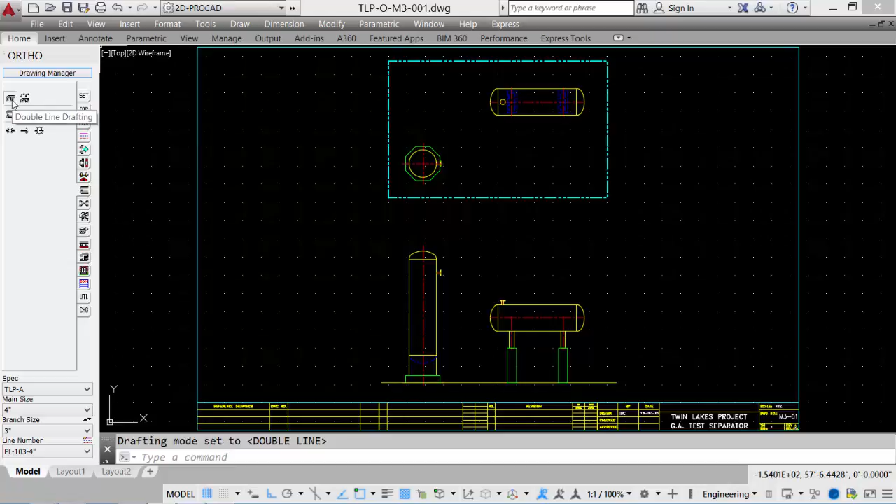So let's just zoom up on the side of our drawing before we actually place any components on our equipment. Let's just look at how the pipe tools work. Selecting our pipe tool, it asks for a start point and an end point, and a pipe is drawn. We change our pipe size, 8-inch, place pipe, just randomly.

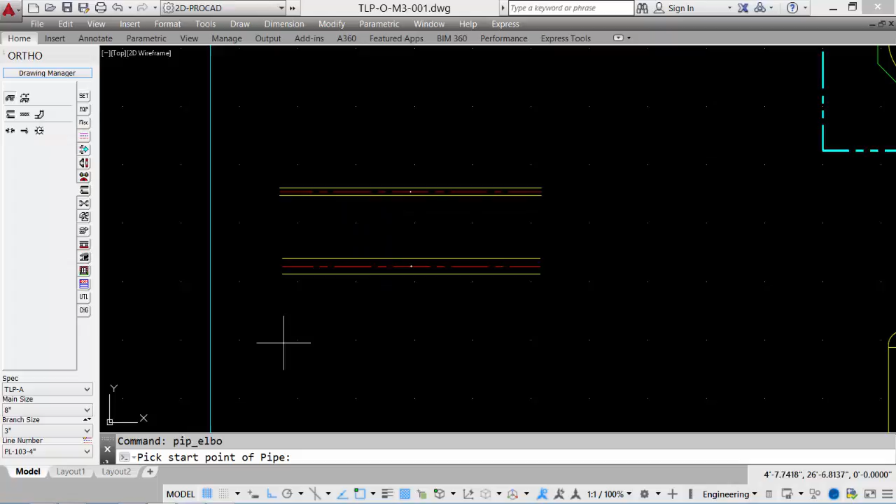We see the pipe. Again, the drawing scale for this drawing is 1/8 inch equals 1 foot. We actually see the deviation between 4-inch pipe and 8-inch pipe. There's a tool for adding pipe and an elbow. I can just add one elbow or two. I'll just show one. And we can pick a start point, the center of the 90-degree elbow.

It asks us which orientation we would like for our elbow, options available, and the default current selection. Then we just say draw a 90-degree elbow. It asks for a side for the elbow, and we can either pick down or up.

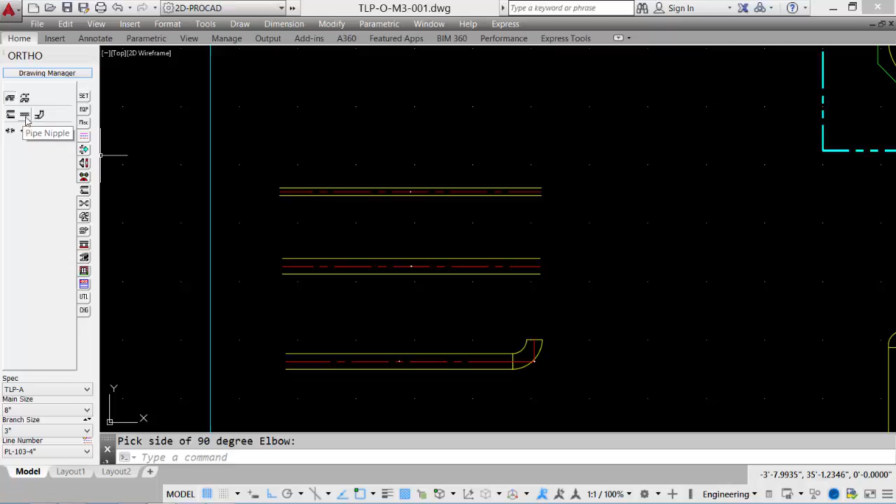There is a pipe nipple tool, so when we are down under 2-inch or less, let's go down to a 1-inch pipe size. We can now place a pipe nipple, and it asks whether or not you want it threaded both ends or plain one end. And there is our pipe nipple at 1 inch to scale. We'll go back to 4-inch.

Some of the other tools that we have are the pipe ends. So if we need a pipe break, we can actually pick one side of the pipe, the other side of the pipe, and then a distance along the pipe, and it breaks the pipe and shows our pipe break symbols.

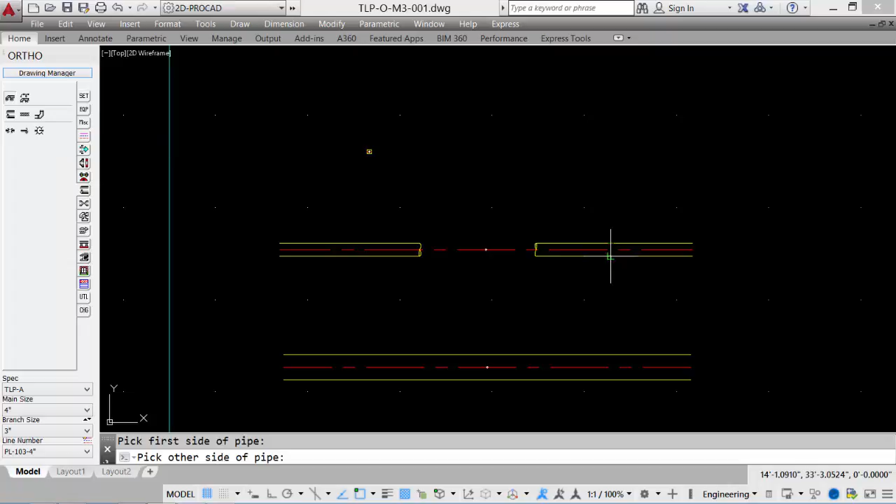We can just put in a pipe end symbol or floor or wall penetration symbol. We can select our pipe, other side of the pipe, and then the direction. And it puts in a pipe penetration symbol, showing it either going through the floor or through the wall in this case. Let's set it to single line drafting.

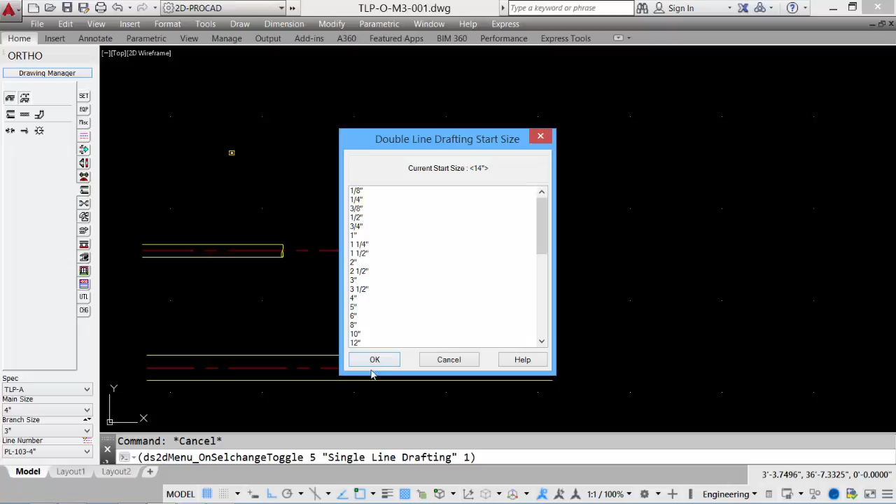Take a quick look. It always asks for when we want the double line. Even though we're in single line, a lot of companies have a starting size of 14 and larger that is always drawn as double line, even though it's a single line drawing. So we'll just take the default. Again, set it 4-inch. Let's place some pipe.

And now it shows up as a solid, thick line. Pipe with an elbow. Take the default. Point down this time. And now it shows the pipe plus a 90-degree elbow in single line. We'll set it back to our default.

Our next topic is the components. So now that we've covered the pipe, we've looked at all the different pipe options, let's look at all the other components. So we have flanges, we have gaskets and bolts, we have all of our different types of valves, from gate valves to globe valves to ball valves, to all of our piping fittings.

So our elbows, 90-degree elbows to 45-degree elbows, to reducers, to swedges, to tees and reducing tees and crosses, and things like weldolets, sockolets, and threadolets, all of those types of components that can be placed, all to scale, and all set by our spec, our main size, branch size, and line number.

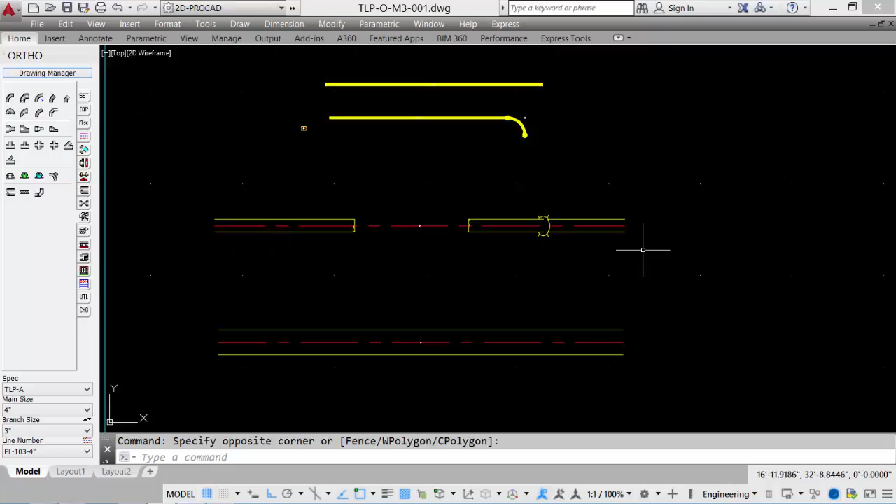So again, we always make sure we set this and change it as we draw to make sure that we're getting the right components. But let's just take a look at some of the basic components, things like a 90-degree elbow. Let's say I want to put a 90-degree elbow at the end of this pipe. Select our 90-degree elbow tool. The dialog appears and allows us to set the insertion point, either the weld point or the center point, and then the type of elbow that we want placed.

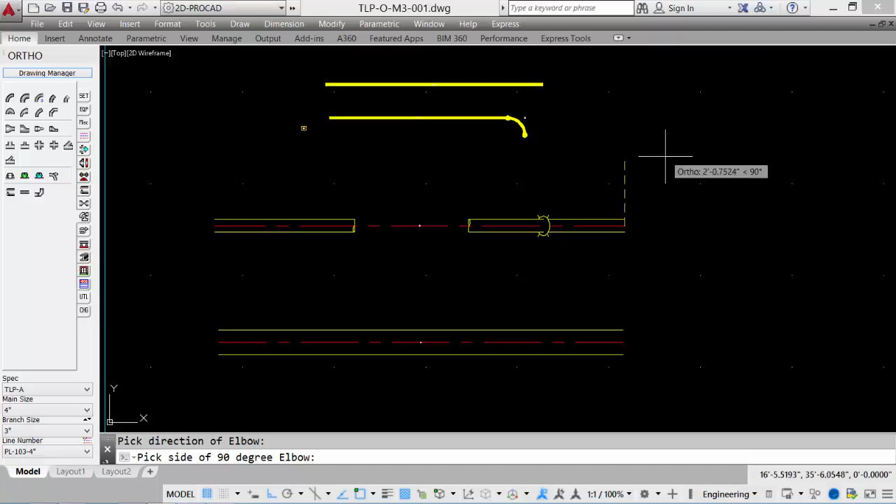And it's a long radius by default. Click Draw 90-degree elbow, and we can pick the end of this pipe. Pick direction of the elbow, we want to go down or up. We'll go down in this case, and it will attach the elbow to the end of the pipe.

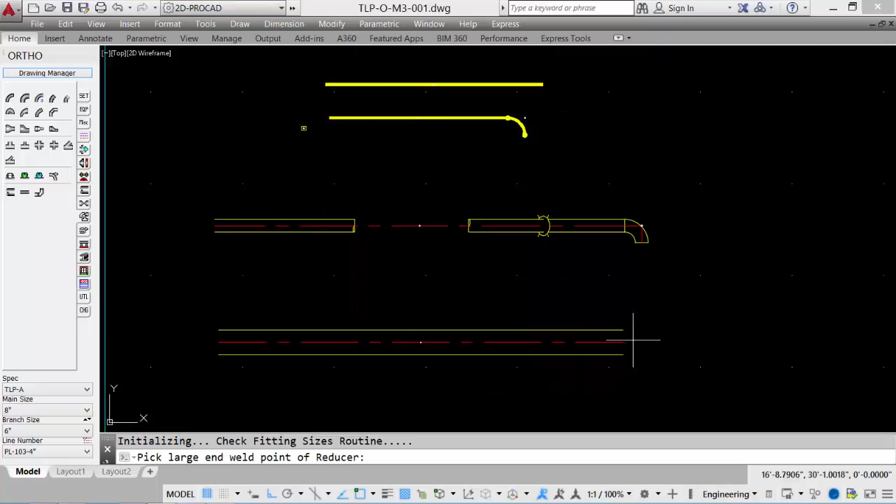We can come down to our sizes. Set our main size to 8-inch, branch size to 6-inch, and then we can select a concentric reducer. It shows us the sizes, and they can be changed, but we're picking up the current sizes, and we'll say OK. And I'll pick this end of the pipe, the direction, and it now puts in an 8x6. And you'll notice over in our status area that our main size has now been automatically switched to 6-inch from the 8-inch.

Let's look at placing a flange on our drawing, so we can select the flanges tool, select a weld neck flange. Select the insertion point, so we'll select the weld point. Click OK. We'll pick the end of the reducer and the direction. And our 6-inch flange is now placed.

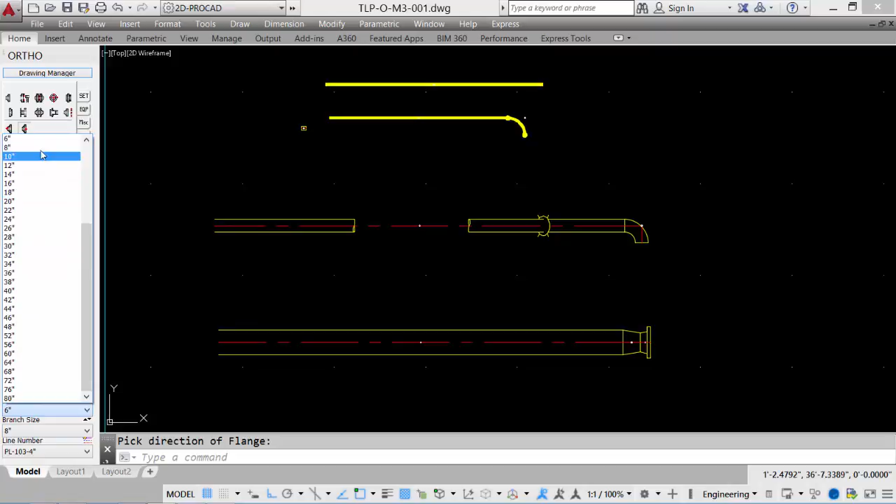Let's place a flange at this end, and we'll include a gasket and a bolt. First, we'll set our pipe size to 8-inch, and then we'll select the flange gasket bolt tool. Again, we'll select the weld point, click OK, pick the end of the pipe, drag to the left, and now it puts in a flange and a gasket bolt.

These symbols will not plot. They are on a layer called Defpoints and do not plot, but they are shown so that the drafter can see that the actual gasket and bolts were placed within the drawing.

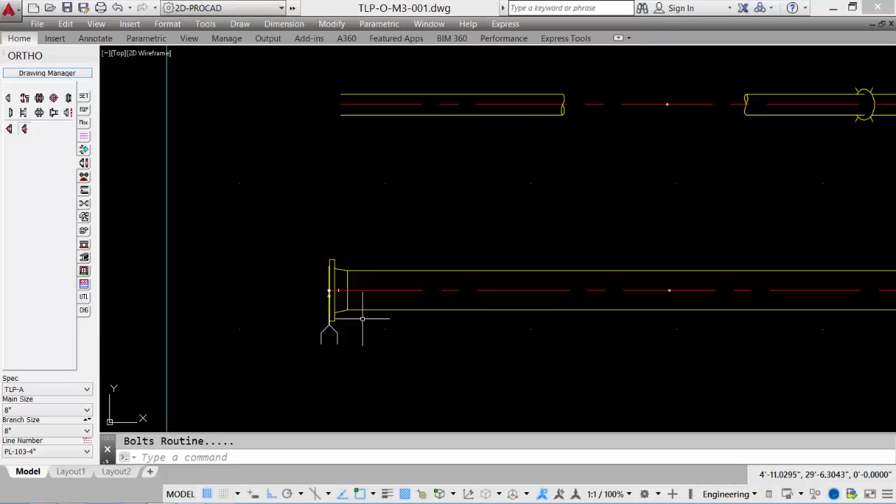We can place a flange off of this elbow here. We can then go to a 4-inch size. So again, I'm changing my size as I draft, pick the flange, and then I can pick the end of the elbow and drag down, and the flange is placed in that orientation.

Let's look at placing some valves. So I'll go to my valve tab. All the different valves are displayed. Set it at the flange, gasket, and valve. Gasket, valve, gasket, and flange, so if I had an existing flange that I want to draw from. And then if I just wanted to put in a full complete flange and valve set, where it would be the flange, the gasket, the valve, the gasket, and the flange.

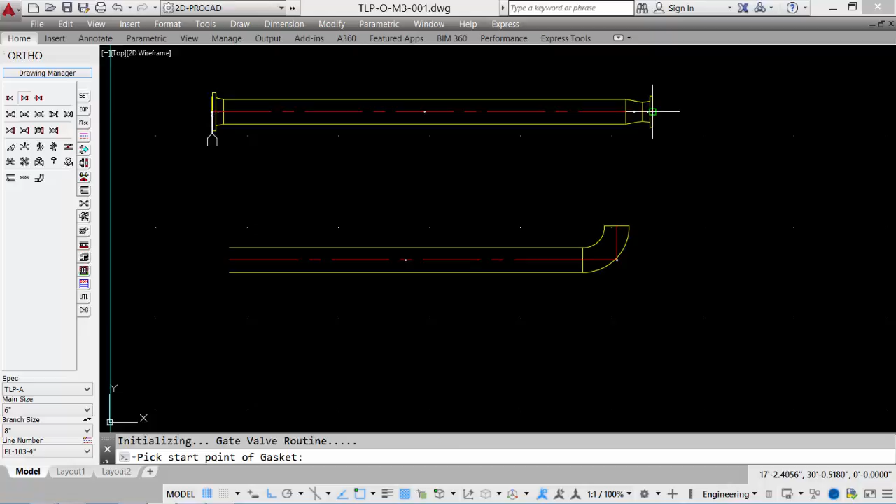So let's just put in a valve off of the end of this pipe here. So I'd first set my pipe size. We know that's 6 inches. I have an existing flange, but no gasket, so I would set it to the second item. And then let's just put in a gate valve. Pick the end of the flange, pick the direction, and it now adds the gasket and bolts in.

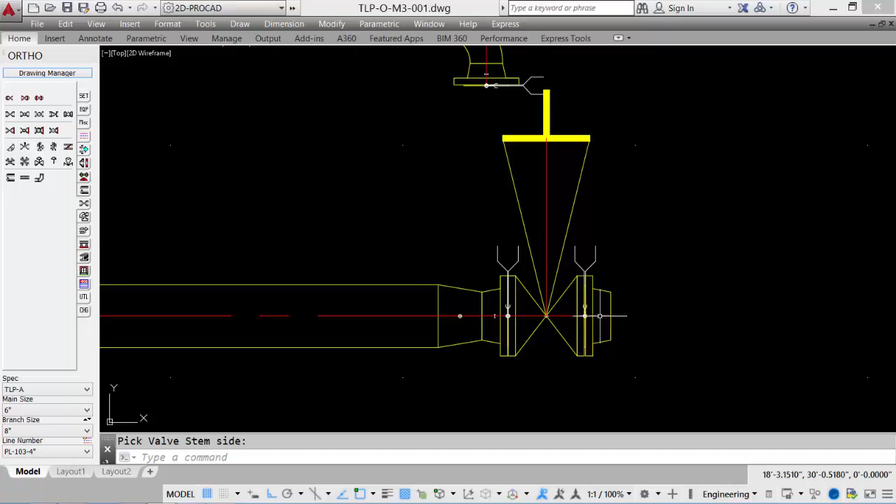And then it asks, do I want a valve stem? And we can say yes or no. And if we do say yes, what orientation do we want? Plan, side, or rotated? We'll just say side. Say OK. Pick the side we want the hand wheel to show up on. And then it completes the valve. So there's our valve stem, another gasket, and another flange. So placing components is quite simple, just a matter of setting our size and then selecting the components.

The next topic is info blocks. So once we've completed a drawing or worked on a drawing, we want to know what size a pipe or a component is. There is, under our settings tab, an item info tool which allows us to go in and select, for instance, the pipe, and it tells me it's 8-inch pipe. It tells me the spec, the line number, and a description. All of this information is set up in our spec generator.

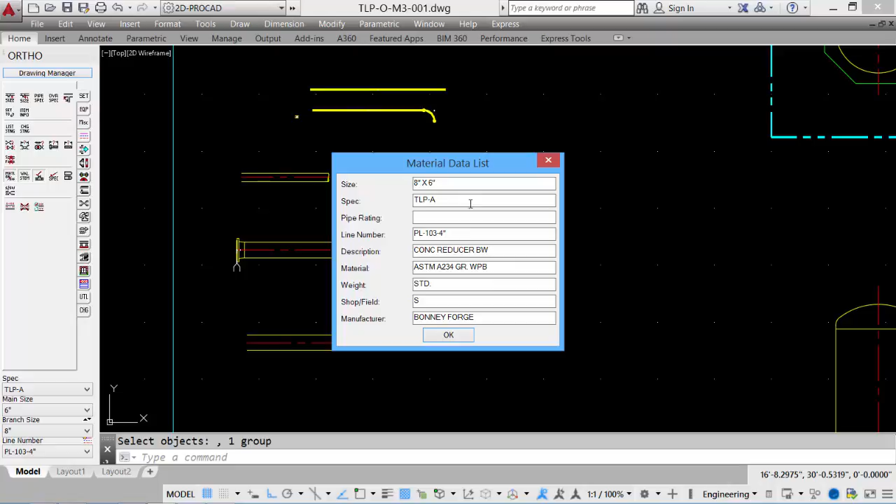So it's a good way of finding out what size components are if we're not sure. Selected my reducer, 8x6, concentric reducer. All of that information is shown.

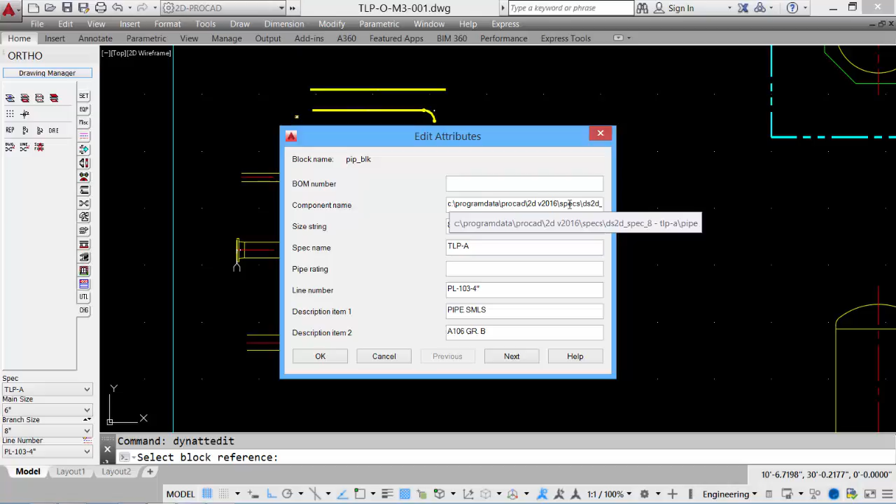For a more detailed view of a particular component, under the Change tab, we have our Dynamic Attribute Edit tool, which allows us to edit the information shown on a component. It also shows the component name and the file location of where that component is within the software. So if you're looking for the exact file where that pipe is located, it tells us the spec, the location, and the component. We can select Next, and it tells us the information, the dimensional data, all the information regarding that symbol. Very useful if you are looking at editing or adjusting the spec or the material data files.

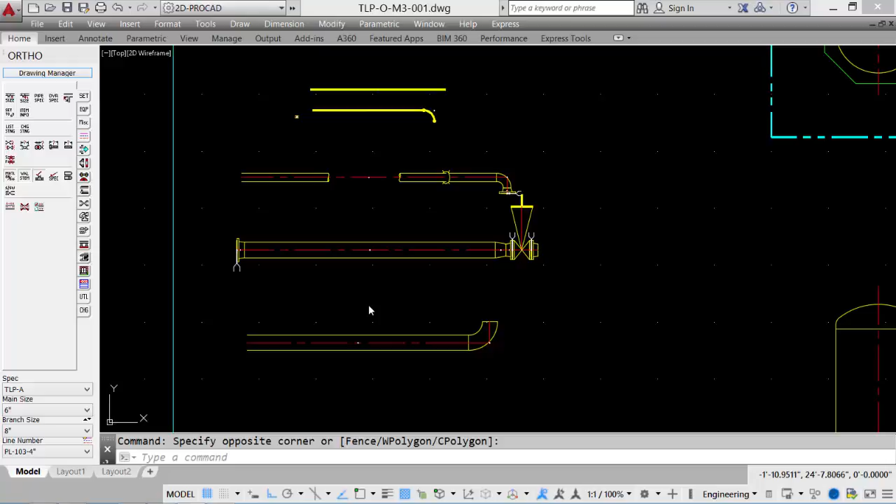The last topic in Module 3 is the AutoRoute feature. We'll look at placing components automatically, and then placing the piping in our drawing in both the plan view and the elevation.

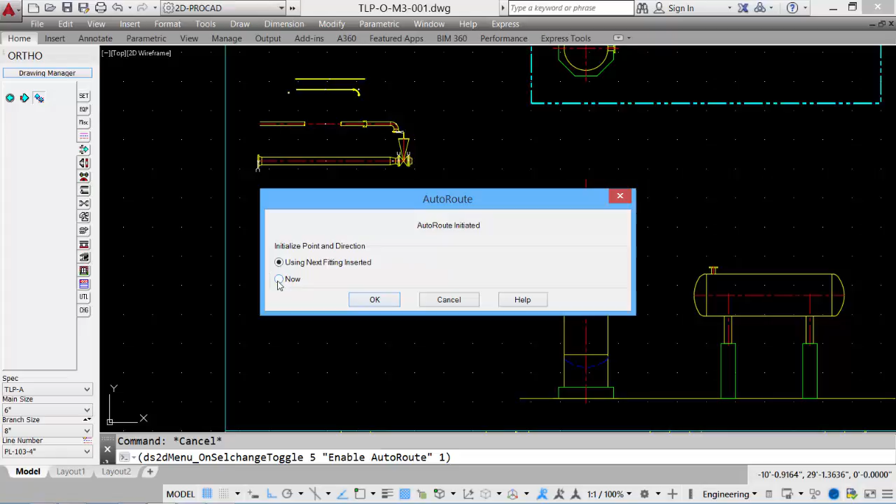The AutoRoute feature allows us, rather than having to pick the end points for instance when placing an elbow, to have the system automatically do that. So we'll go to our AutoRoute feature and enable it. It asks if we want to start it now or using the next fitting. I'll just use the next fitting.

Now I've set up my sizes. Let's set it to 8-inch to 6-inch, just for this sample. Then we'll go in and place some pipe. Click our pipe tool, and it places pipe like normal.

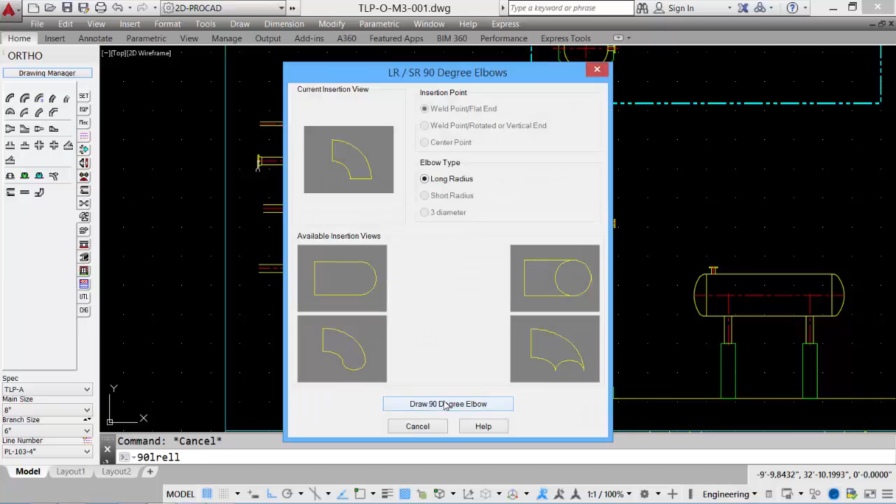Now when I add my next component, let's say we add an elbow to turn down, drawing a 90-degree elbow, I don't have to pick my start point. It's automatically selected as the last point. So all I have to do now is pick the side of the elbow, and the elbow is drawn.

I can then pick some pipe, and the start point of the pipe is automatically at the end of the elbow. Place another elbow, this time going to the right, and it automatically places the component. So as long as we know the dimensional data, we can quickly route the pipe.

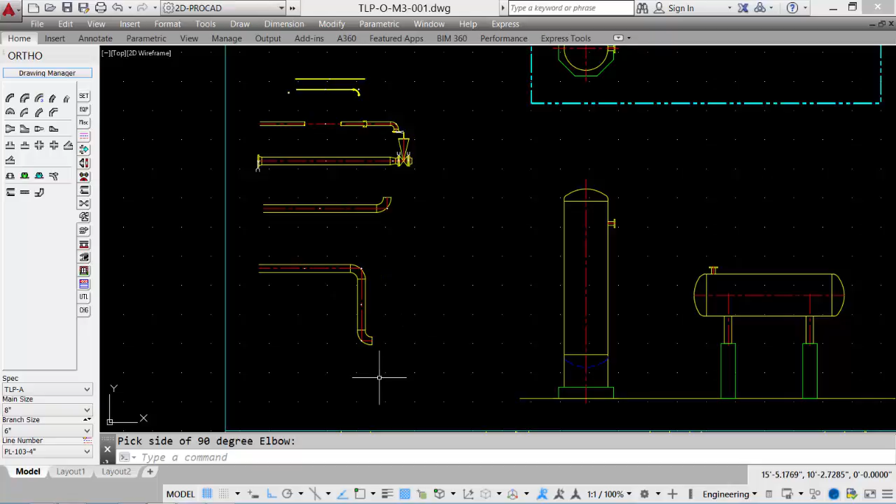Let's go in and place a valve. I'll select my valve with the flange and gaskets, pick everything, and then pick the gate valve. Again, we'll go to the side. It places the flange, gasket, valve, gasket, flange, automatically on the end of the elbow. I can then add a piece of pipe.

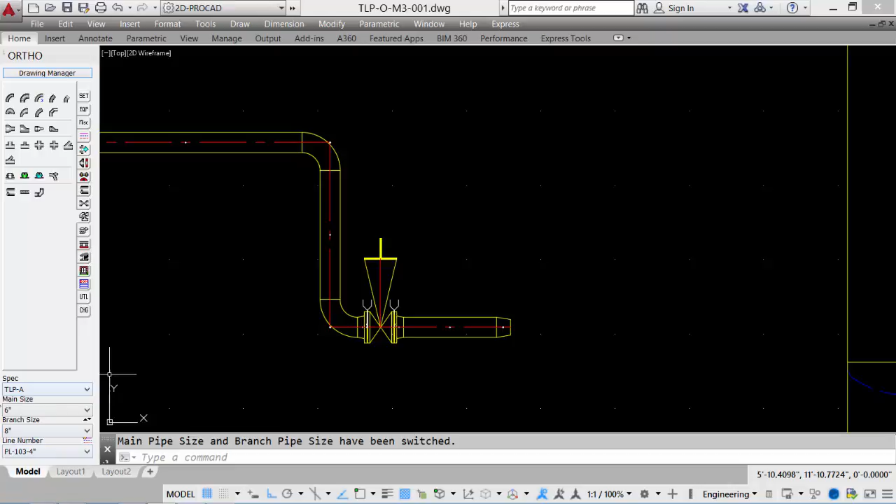I can go to my fittings and do a reducer. It automatically places the reducer, and also automatically changes the main and branch size. So now if I place some pipe, it's very easy to do.

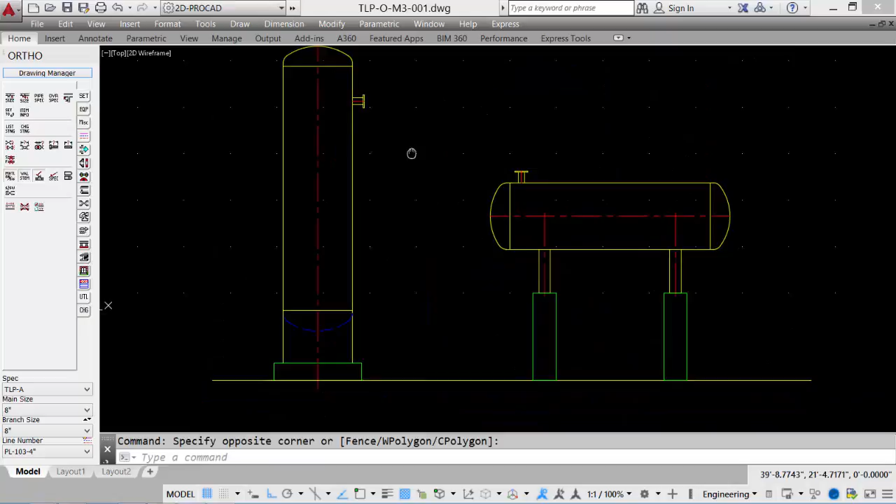At any time we can disable this by going back to our AutoRoute and disabling it. We can now place components individually. So let's erase all this extra piping and components, and look at adding the pipe to our drawing. We'll place our pipe, fittings, and components, starting with our elevation.

I'll set my sizes back to 4 inch to 3 inch for my branch size, since these are 4 inch nozzles. Then we can go in and start placing the components. If we know all the information, we can enable our AutoRoute feature.

We'll start off by drawing a piece of pipe with a flange and elbow. We'll come down through a valve down here, come back up with some pipe, and then tie off into the top of this nozzle with another flange.

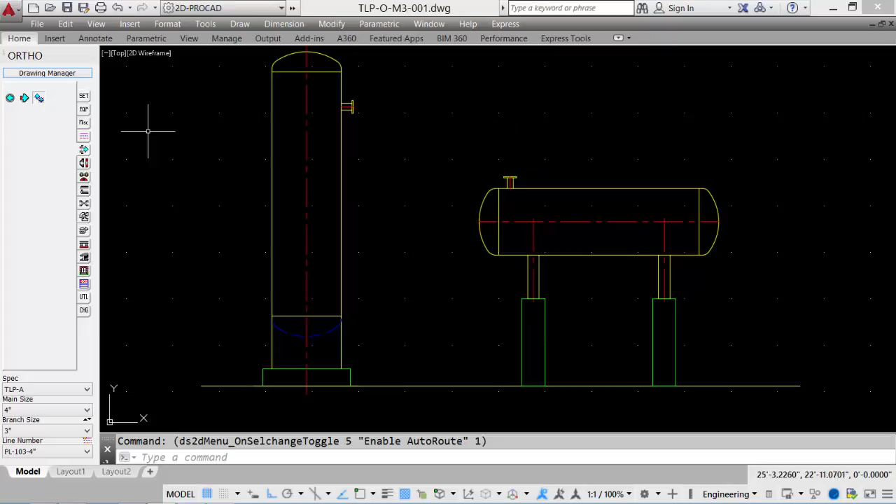We'll pick our flange and gasket tool, select the face of flange since we're going to mate up with this face of flange, and say OK. Pick the start point, pick the direction, and it places the gasket, bolt, and flange.

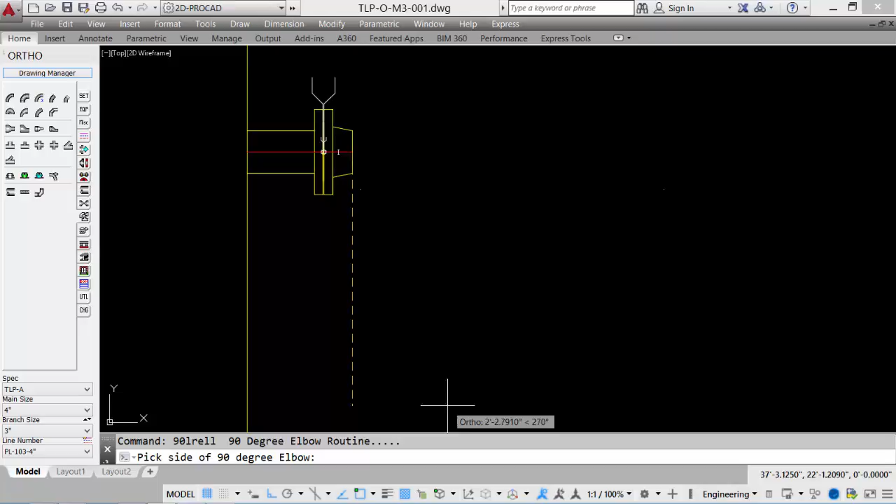I can then go to my fittings and place my 90-degree elbow. We're going to point it down, so that's the correct orientation. Select down, and there is our elbow.

We'll put in a piece of pipe, taking it somewhere near the bottom of the drawing, just guessing. We'll add another 90-degree elbow, and then let's say we want to put in a block valve. We'll put it on this side, and there is our valve placement, all automatically with the AutoRoute feature.

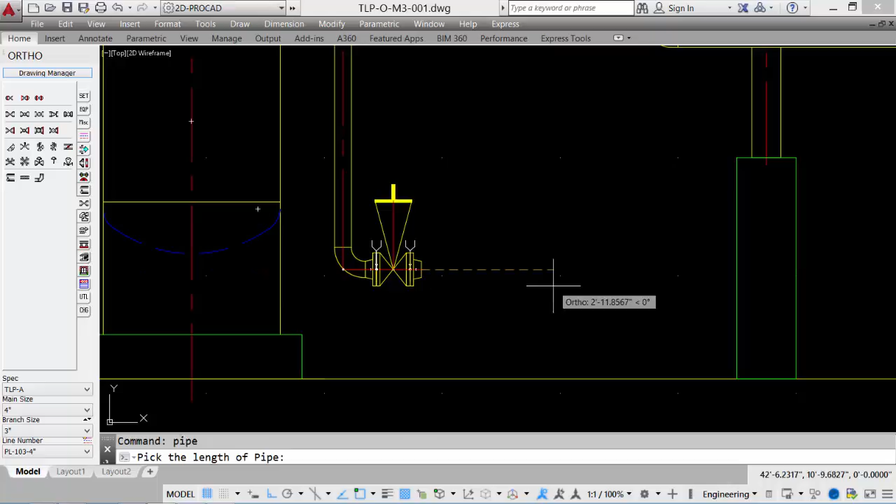Place another piece of pipe, random length. Then we'll go into our fittings, elbow pointing up, piece of pipe, and I'm just going to take it somewhere up near the top here, since we're not quite sure yet.

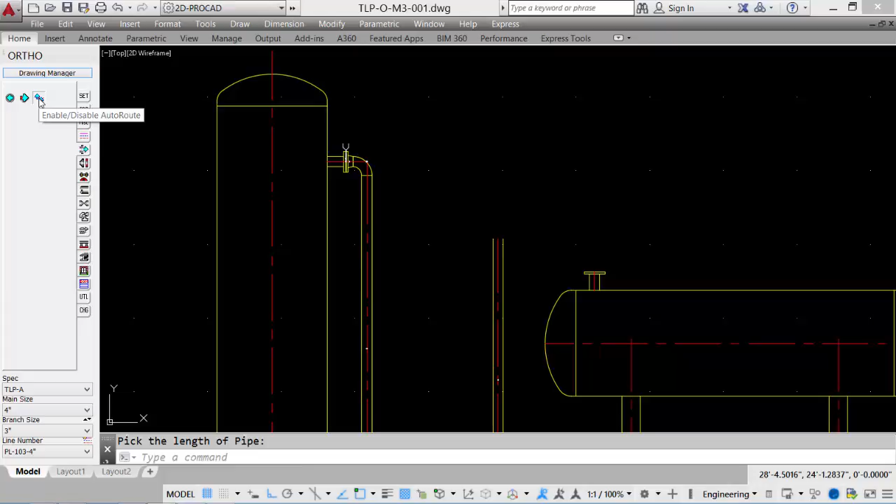What I want to do now is add a flange and an elbow coming off of the top of the vessel, so I need to turn off my AutoRoute feature. We just disable it, and then go back to our flanges.

Select our flange gasket bolt, pick the top from our nozzle, and our weld neck flange is placed.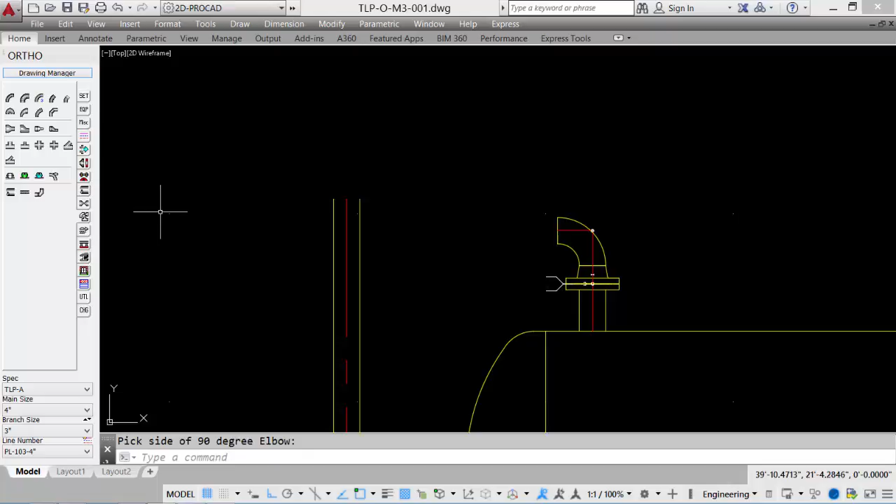We can then go into our fittings, place a 90-degree elbow, pick the start point, and then the direction. Now we can use an AutoCAD line command just as a trimming feature, and trim off to get it to the center line. So really what we're looking at here now is this center point.

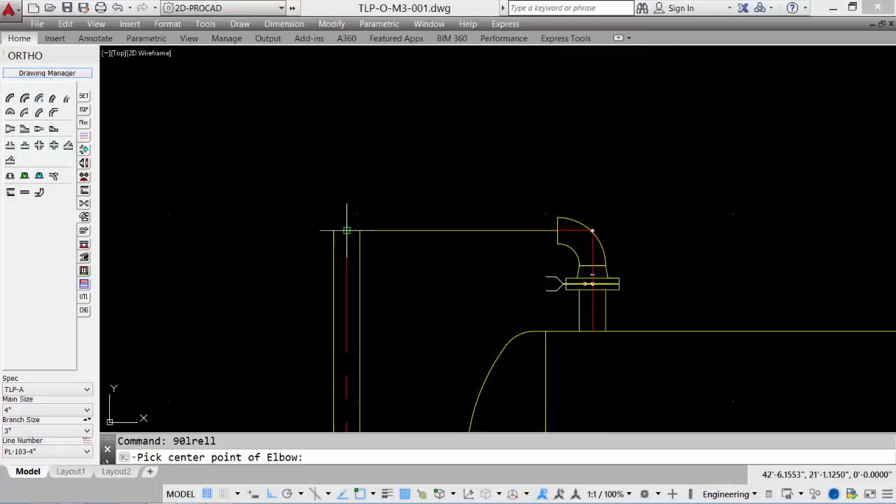So now if I place an elbow in that elevation, we'll be coming up and turning into the drawing. This is the orientation we want. I want to select the center point and then pick my 90-degree elbow, so the center point, then the flat side pointing down. We can see now the elbow is pointing down.

We would have an elbow on the back side turning to the right to match up with this one, so another 90-degree elbow. This time we use this orientation, again the center point. We pick our orientation, draw the elbow, pick up the center of that current elbow, and then place the flat side. The white circle does not plot; it's just there as a reference so you know it's a 90-degree elbow.

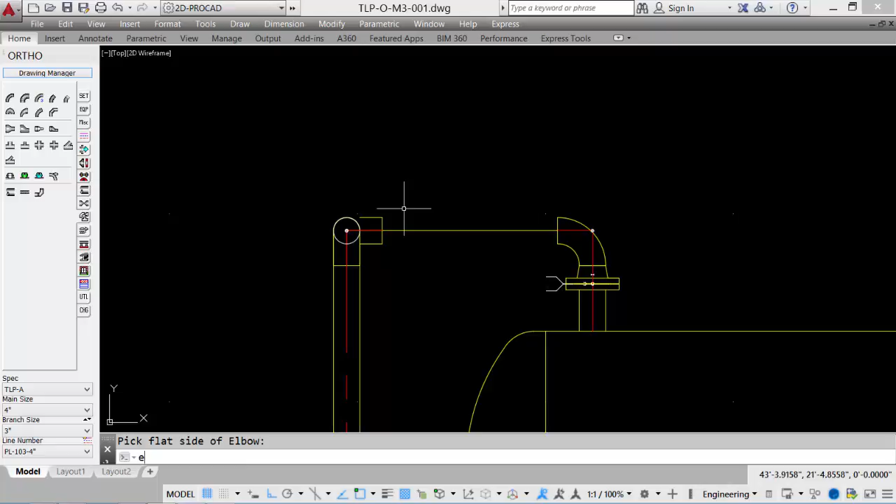We can use our extend and trim tools to fix any features that need to be extended. Then we can get rid of our construction line, and we can place a piece of pipe between the two elbows to finish off that view.

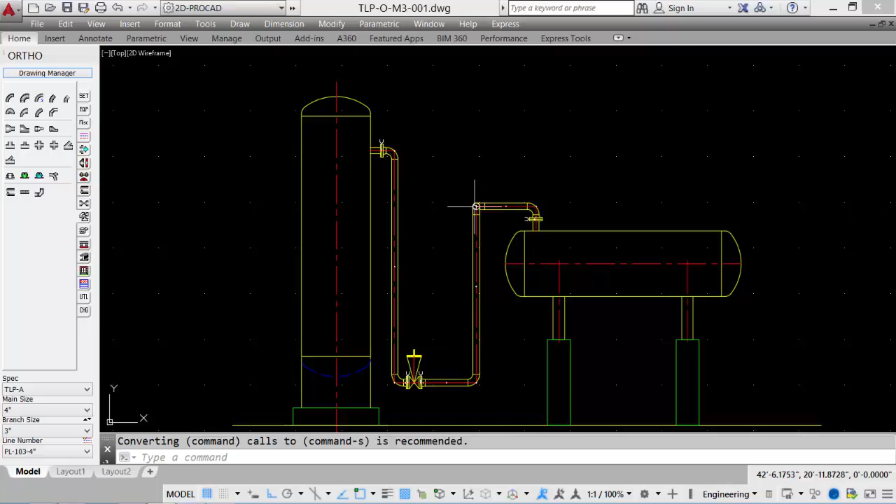So there is our elevation view: elbow down, turning down, through an elbow, through a valve, through an elbow up, through an elbow going away from us, turning to the side, and then coming down into the top of the vessel. Let's look at doing the plan view of that same feature.

So again, we can do a little bit of orthographic work. We can grab a line using AutoCAD and pick up the centers of these flanges to give us an idea of where some of these components are going to be coming from. Those are just construction lines I can use as guidelines.

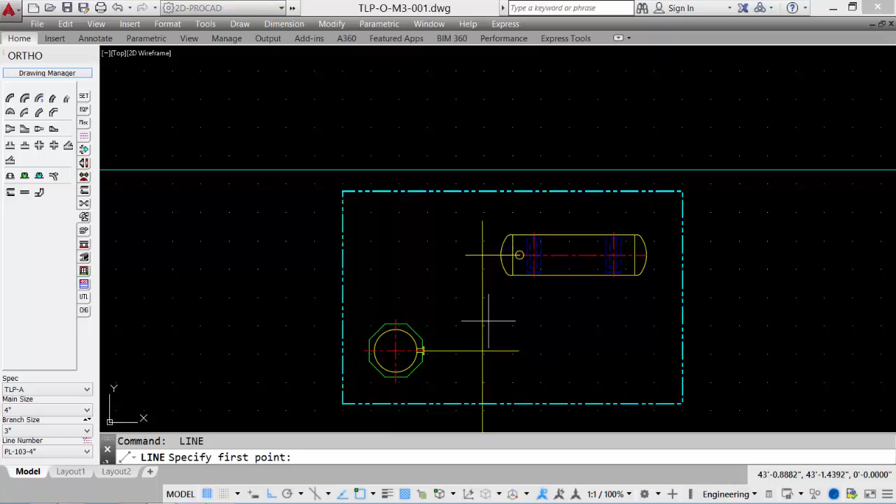We can go to our flanges. Face of flange coming off of a vertical vessel. There's our flange coming off.

Go to our fittings, 90-degree elbow. This one would be turning down, looking from the plan view, and we would want the weld point. Pick up the end of the flange, pick the direction, and there's our elbow turning down.

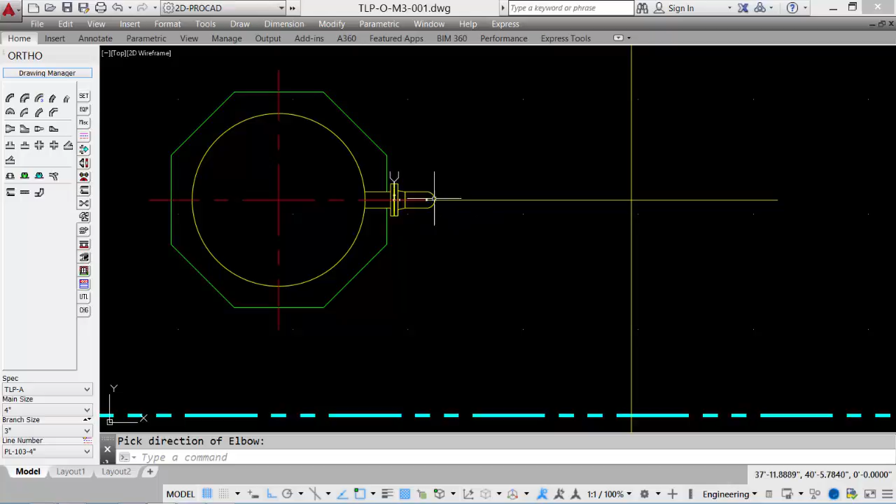So underneath that is a vertical run of pipe. And if we look at our elevation view, we have the elbow that turns and then goes through the valve.

Again, on this view we select our 90-degree elbow, select this one for the orientation, and again center point. Draw the 90-degree elbow, and pick up the center of that existing elbow, then the direction. Again we use our extend and trim tools to extend the lines from that fitting to the existing elbow. Now we're looking at the top view of the valve.

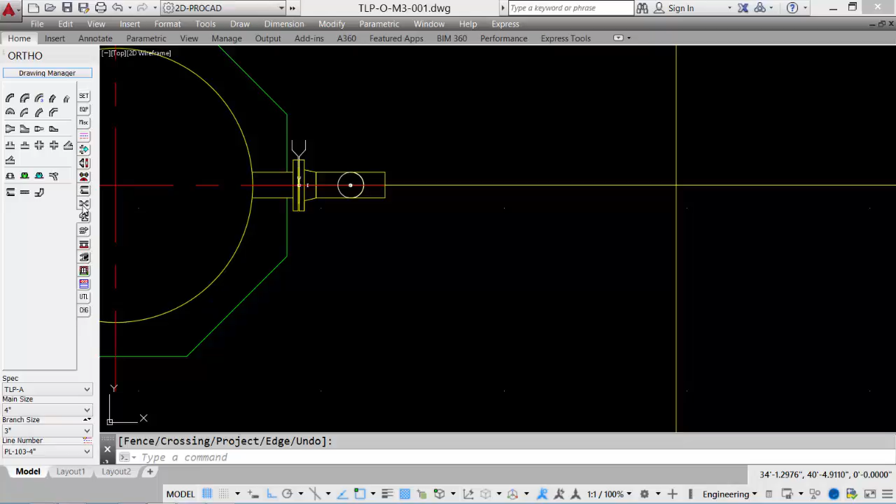We'll go to our valve tools and pick the same valve. Pick the start point, the direction. This time the stem will be in the plan view, so we'll just take the default, and it shows us the hand wheel in the plan view.

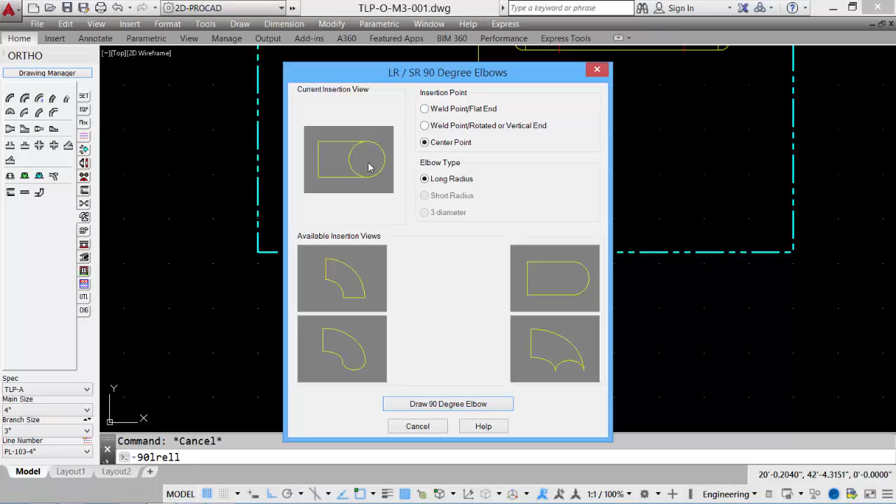Now we have this intersection over here where the elbow turns up, or we even place the pipe. We can go to our elbow and pick the center point, and that's the elbow we want. So we can draw that elbow from that intersection back.

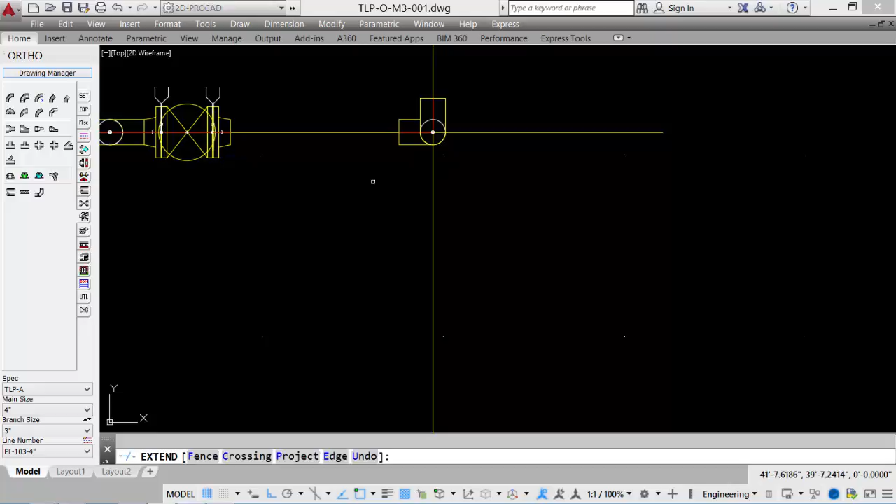We would then have an elbow that's turning away, again with center point. We can pick up the center of this existing elbow, give it the direction. We can extend our lines just to finish that off, and then add the pipe in between.

The two fittings, so this is looking down on that piece of pipe. Now we have a flat elbow going to come and turn to go into this one. We can place the elbow.

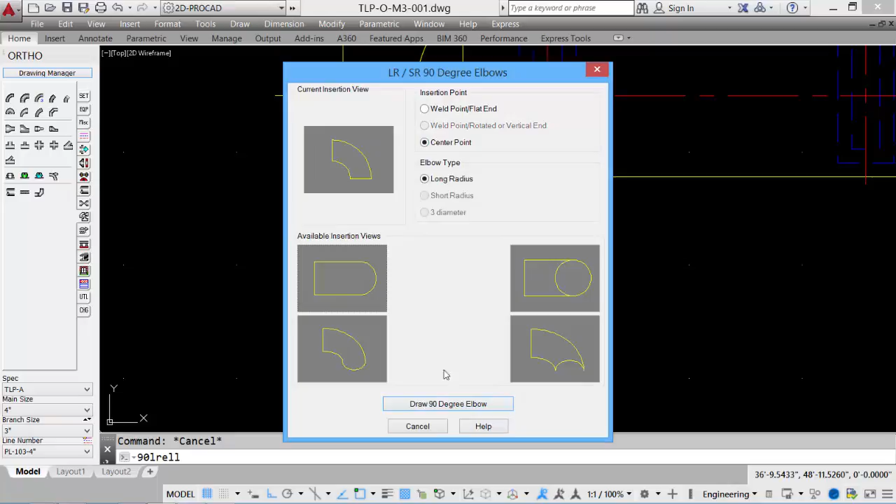It'll be a flat elbow. By center point, using my construction lines I placed, pick up the intersection, one side, the other side, and there's our elbow. We then have an elbow that turns down into the flange.

So we can select this item, center point again, and we can pick up the center of our nozzle. And there is our elbow.

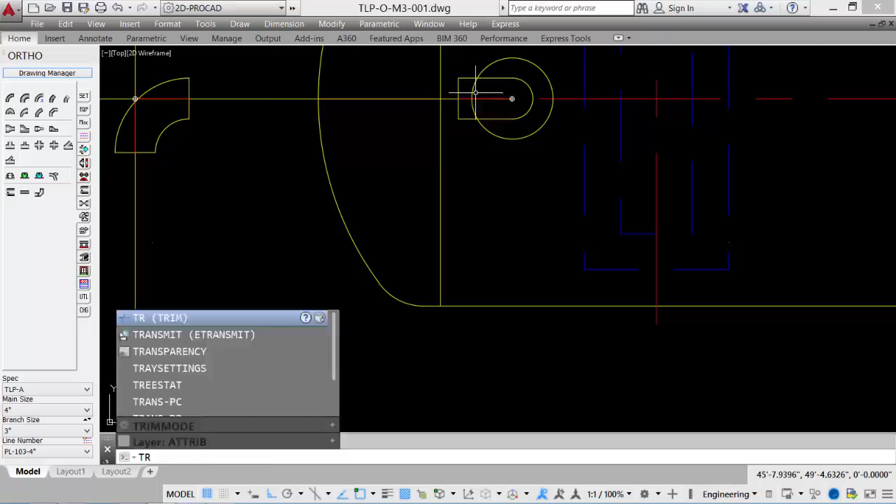We can use our trim tools to trim out some of these features, add the pipe in. I can then erase my construction lines that I had and finish off my pipe run with the length of pipe between elbows.

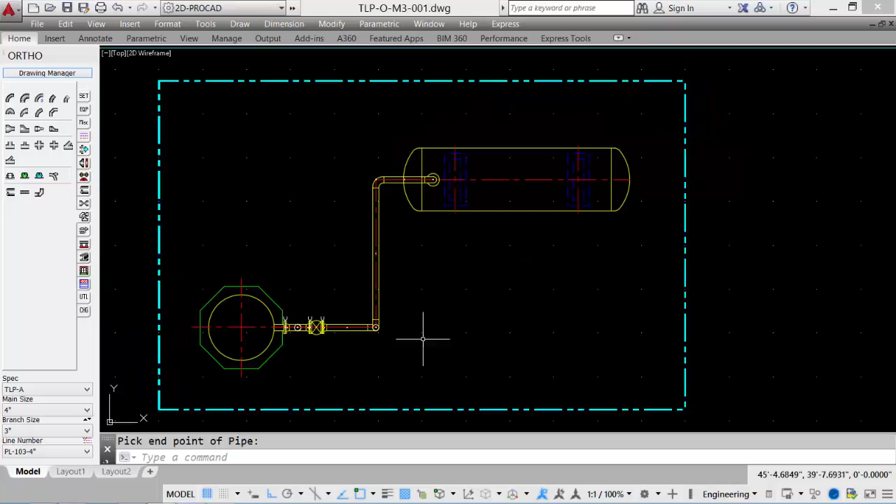And now we're complete. So there is the piping for our plan view, and then the piping for the elevation.